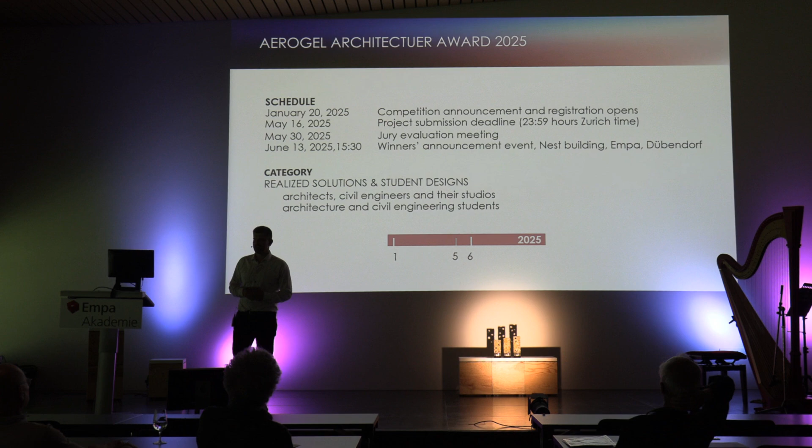In our laboratory, Empa 502, Building Energy Materials and Components, we would like to develop new aerogel materials, and also new aerogel material applications for buildings. That's why we established the Aerogel Architecture Award.

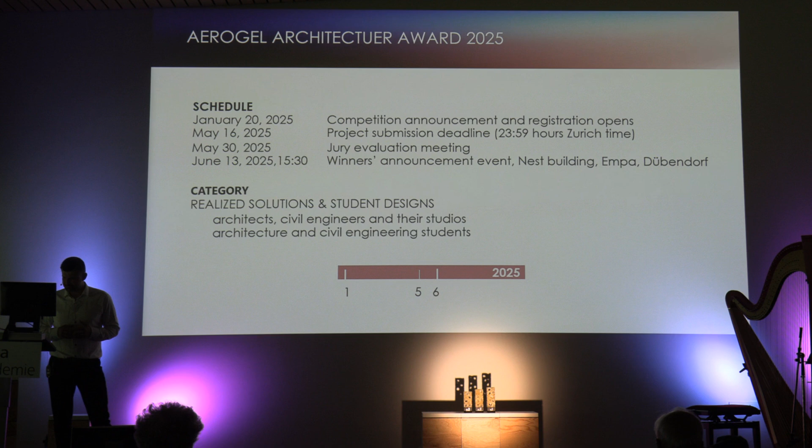We are especially interested in the thermal insulating property, translucent property, and also acoustic properties and their use in architecture. So building application of aerogels - that's why it was established.

This year there are 2 categories, which were open internationally: realized solutions and student designs. But they were joined into a common joint category for this year.

The purpose of this award is to highlight great examples of aerogel use in buildings, and to summarize experience on aerogel use in architecture and construction.

And we believe that it can strengthen the knowledge and also the trust, which was mentioned already here, in the use of aerogel materials. This was only possible due to our

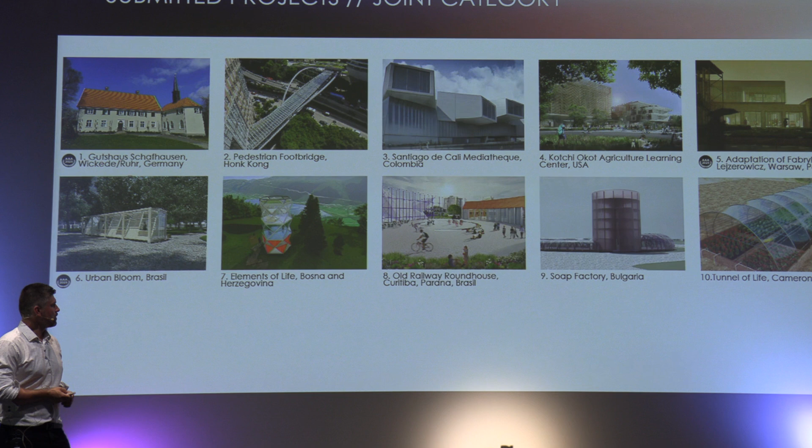Thanks to their experience, the selection and evaluation was in great hands. We received 10 projects in these two categories. We know that aerogel in buildings is niche, but we didn't know it was so niche, so the jury decided this year to join the categories and evaluate all projects jointly, rewarding them with the same monetary prize.

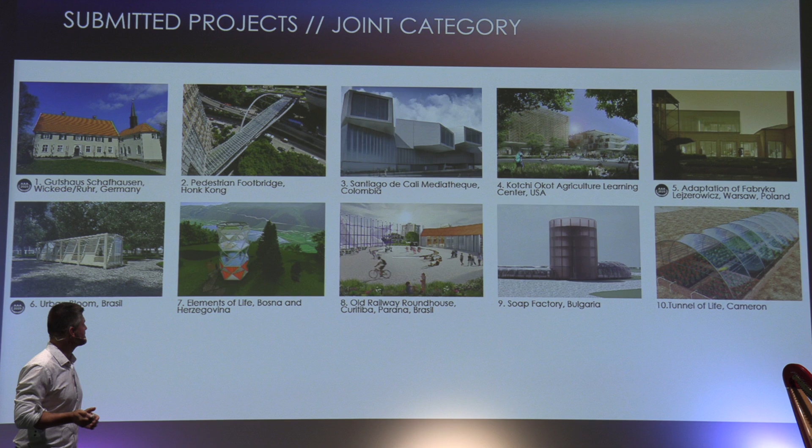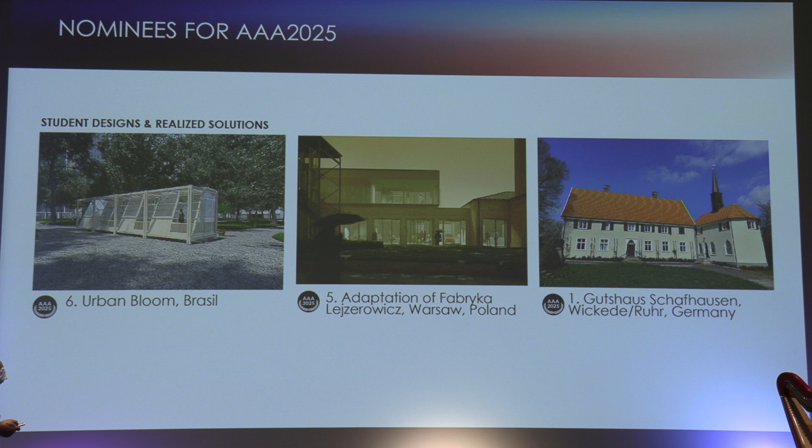Some selected projects: the first is a proposal for a greenhouse called Urban Bloom, from students in Brazil. The second is an adaptation of a factory, the Polish Fabryka Lejzerowicz, located in Warsaw, Poland. And the third, a realized project, is the renovation of the Manor Estate House, Gutshaus Schafhausen, placed in Wickede Ruhr, Germany.

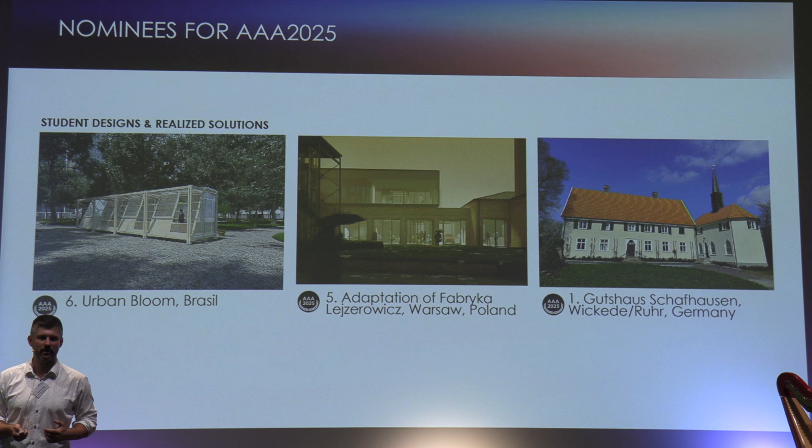Now I will ask our esteemed jury member, architect Manfred Wehdorn, to say some words on the award and the jury's selection. Okay, I can take it. Should function—yeah, perfect. Nice afternoon to all of you.

I'm one of the members of the jury, coming from Vienna, as you have heard. May I make a general statement first? I would say talking about aerogel means talking about sustainability.

To look back at the history—I'm not only an architect, I'm a historian too. You remember perhaps 57 years ago the Club of Rome was founded. And in 1983 the United Nations founded the World Commission for Environment and Development, a long time ago.

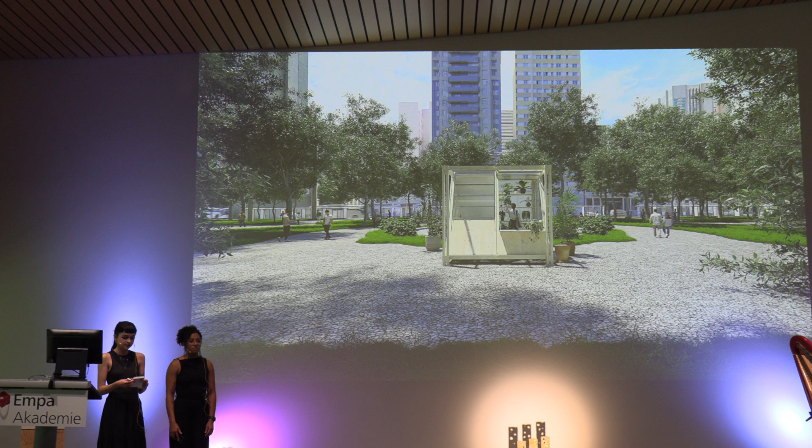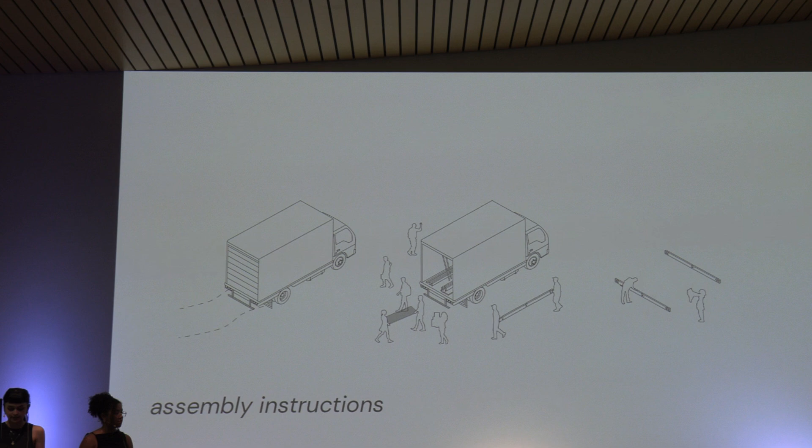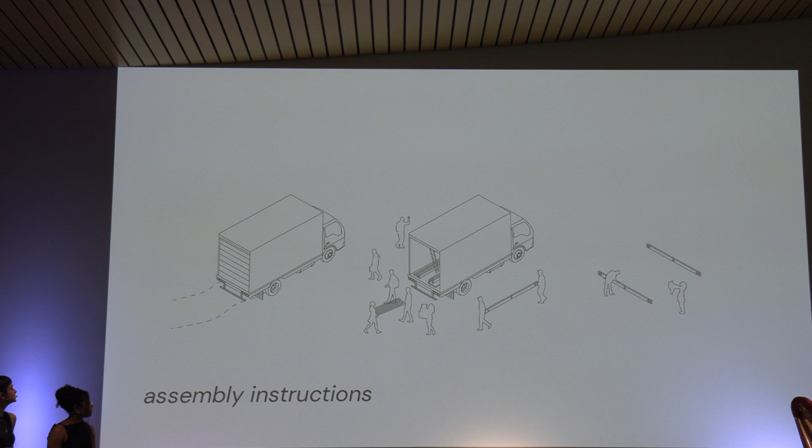One of our priorities in this project was creating a structure that could be assembled quickly and easily by everyone. For that we used prefabricated materials and lightweight components, allowing for community-led efforts. We illustrated this process with assembly instructions that are very easy and graphic, so everyone can read them and replicate and construct it in their own city.

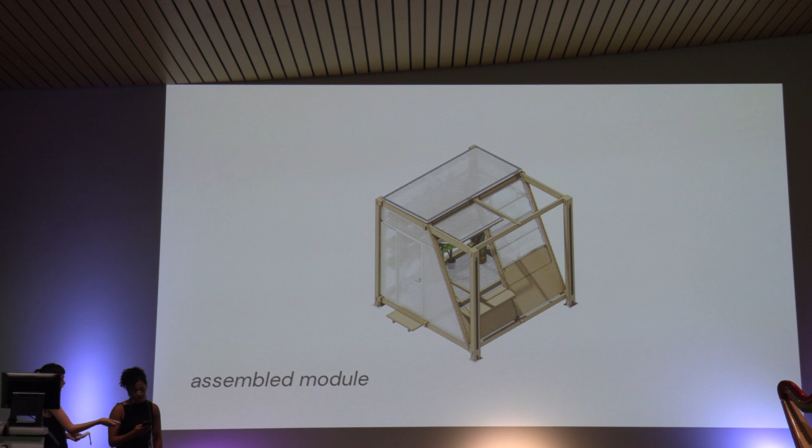Here is the assembled module. It consists of a glue-laminated timber structure sealed with translucent polycarbonate panels filled with aerogel. The design emphasizes modularity, enabling units to connect and be assembled with others if needed, to scale up to a bigger project.

The model is compact, yet it's very functional because it has the inclined facade that can be changed and can create openings in display shelves, so it can function for selling as well as marketing, but I would say it's a very functional, modular design. In this floor plan, you can see better what I just talked about, because you have openings that can show displays, can create displays as well.

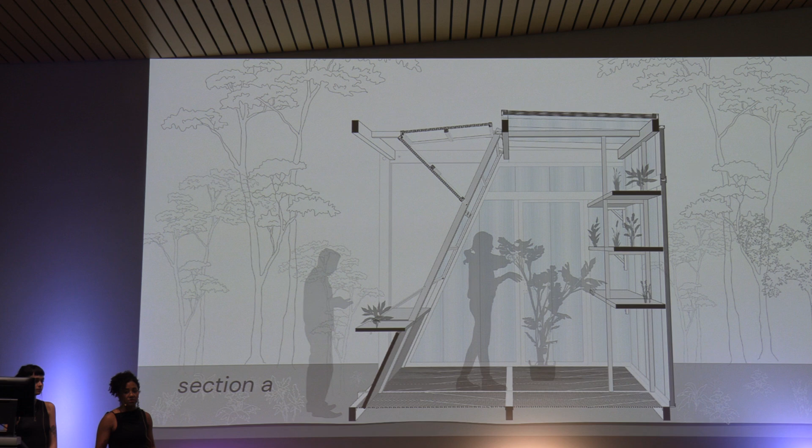In the section view, you can see better the aerogel polycarbonate panels. We use two types, one 40 millimeters and the other 20 millimeters, and we use this material just because of these properties of creating thermal insulation and light transmission capacities. This creates a perfect environment for this type of structure for plants to grow.

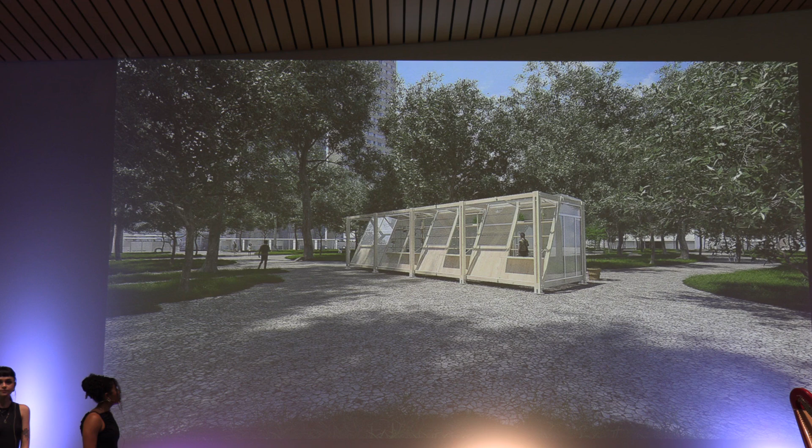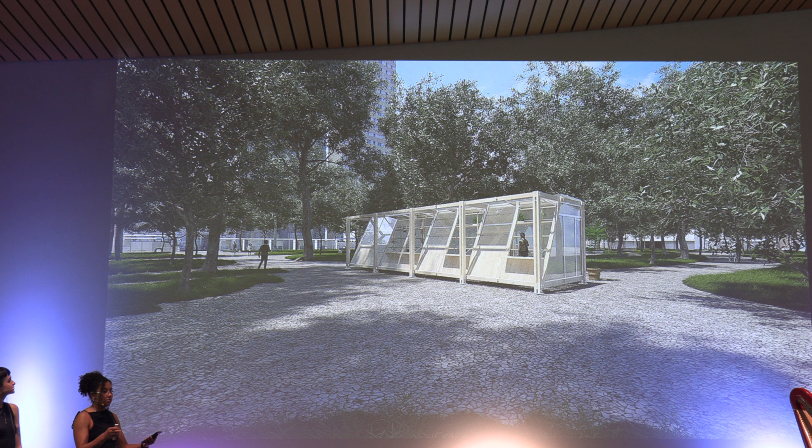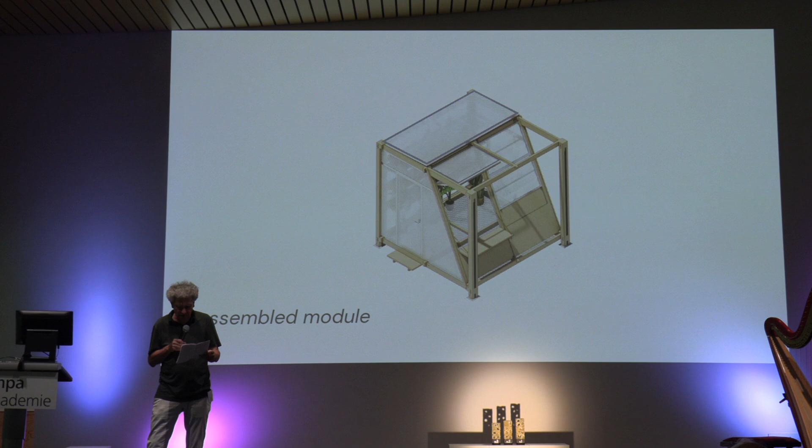The construction is based, as you explained to us, on a timber skeleton and standardized polycarbonate panels filled with aerogel. All parts can easily be transported by truck and assembled by hand on site. For use as a commercial stall, some panels are movable to form canopies or shelves. After use, it can be disassembled easily and transported to another place. Many characteristics of aerogel are highlighted in this project: it is not heavy, well insulating, and transparent. The study shows a new and very innovative use of aerogel. Thank you for your project.

The second presented project in this joint category will be the project of adaptation of a factory, Fabryka Lejzerowicz-Lubelska Kamionek, located in Warsaw, Poland. The design is made by students Jiří Petrželka and Kristýna Klůsová from Czech Technical University, Department of Architecture, Prague.

I can say that this duo already won the Aerogel Architecture Award 2023, first prize in the student category two years ago, and it's a great success again that you were selected among the nominated projects. The floor is yours, Jiří. Unfortunately, Kristýna could not come, but yeah.

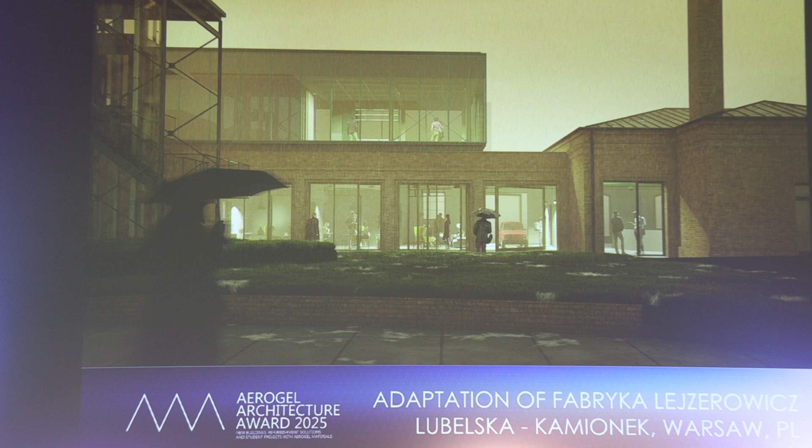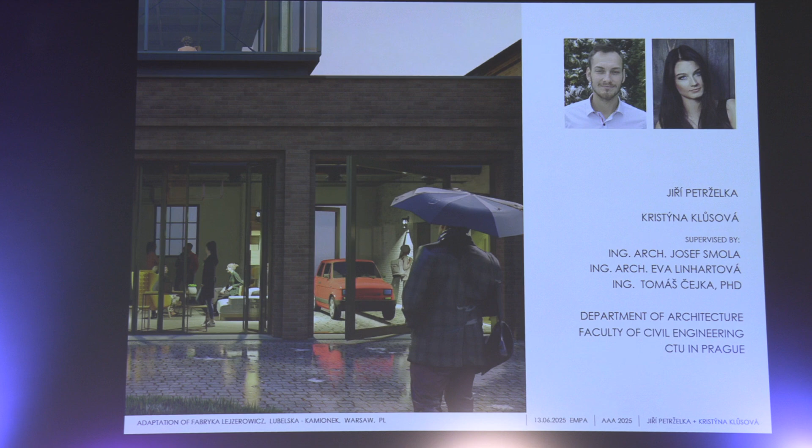It's my biggest pleasure to be here again and make a presentation for our next project, adaptation of Fabryka Lejzerowicz in Warsaw. My name is Jiří Petrželka, and with my colleague Kristýna Klůsová, we are architects and architecture students from Czech Technical University in Prague. For a start, our project is located in Warsaw in Poland, district Kamionek, on Lubelska street.

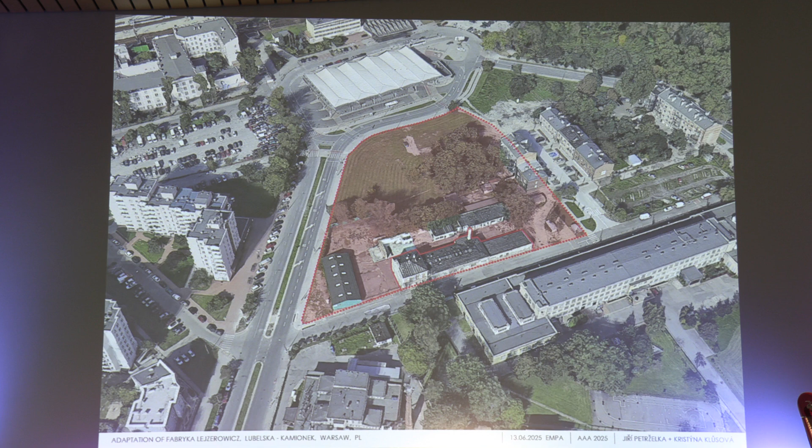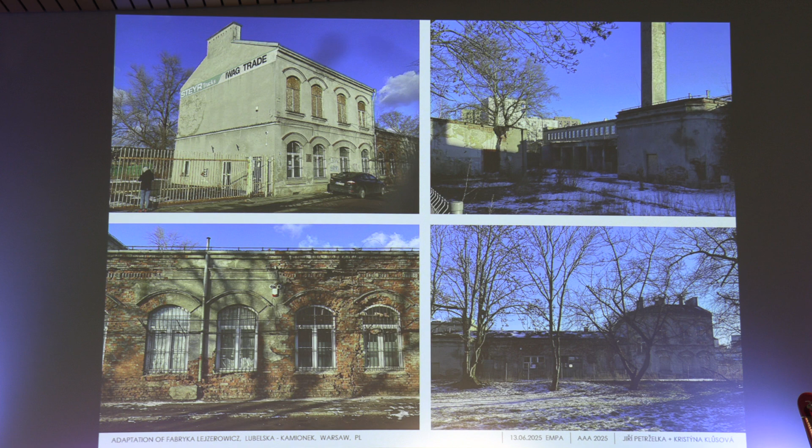Here you can see the site. It's a large area of brownfield with a protected heritage building, and the rest of the buildings are for demolition. Here you can see just some photos from the area. As you can see, the building is in really bad condition due to a lot of the properties or permissions.

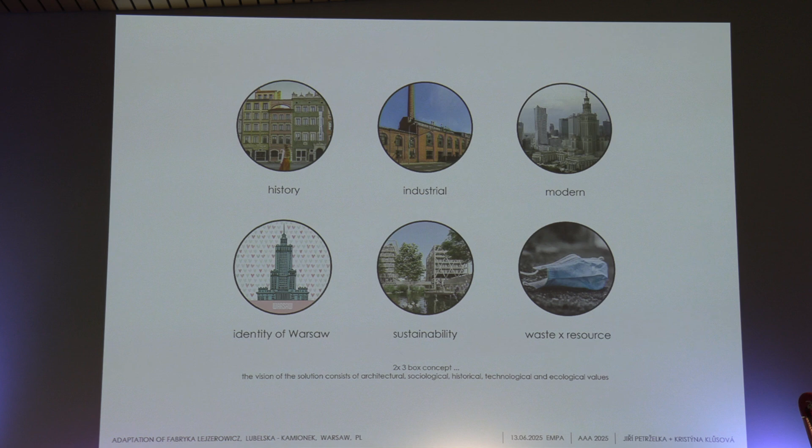And the key for our design was how to connect history and the industrial history with modern sustainable architecture in Warsaw, which is key to the new identity of the city. And the last point was how to work with reduction of the amount of waste and resources.

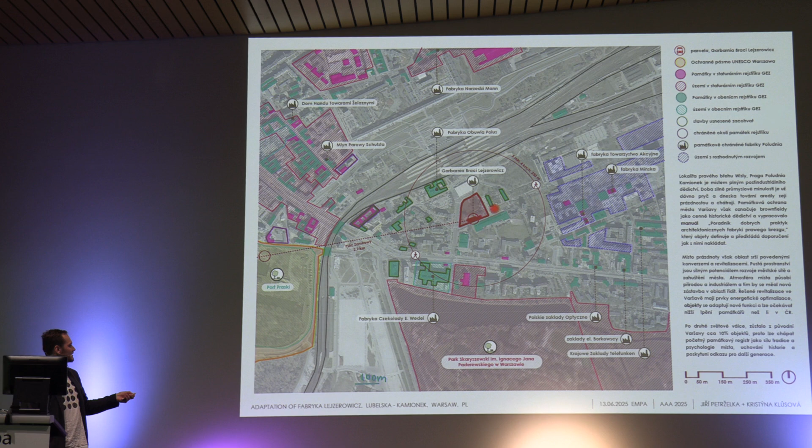In the analysis, you can see that the site is near the train station and bus station with really frequent train and bus traffic. Here's an analysis of the site, where you can see that a lot of parts are heritage protected buildings, and a lot of parts are part of the new vision for the next transformation. And the entire area is full of parking cars due to the frequent public transport.

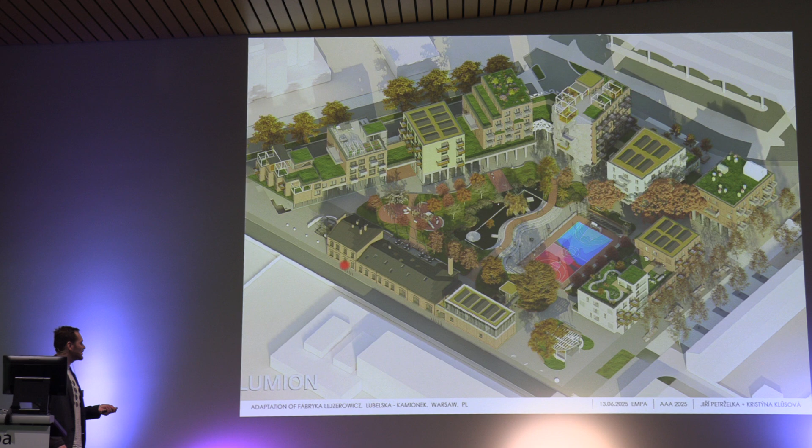The first question was how to transform the brownfield into a new architectural catalyst to change this area in Warsaw. And here is the result: we find the best connection, designing the old building into a new culture and public center, and the rest of the building is co-living, owned by the city.

Here are some urban concepts that we focus on - some views and connections, the division of spaces in height. Our courtyard is the heart of the entire project, and we work with human scale.

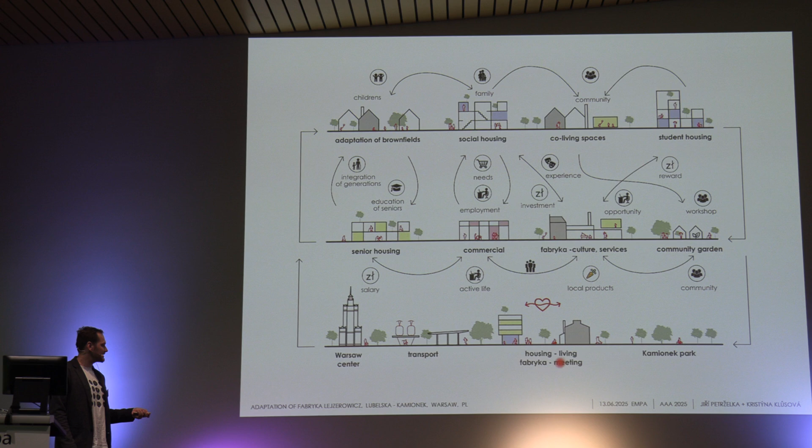Here's our urban concept, where we want to focus on connections and flows between the people in the new area and the entire city. We want to create, from our side, the connection between the city center, the transport, and the surrounding area.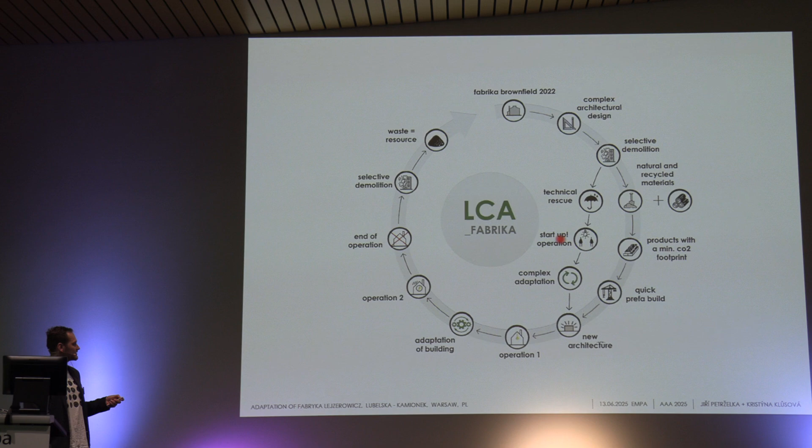We start with the design, selective demolition of the surrounding area, and two lines. The first is the really quick prefabricated development, and the second is the technical rescue of the Fabrika as a meanwhile solution, followed by complex adaptation, resulting in new life for our place.

Here's a visualization of the new co-living in Warsaw. The ground floor has at its heart a multifunctional yard with playgrounds, and the ground floor is full of common rooms and commercial premises. The typical floor is full of living units with some common rooms for the residents.

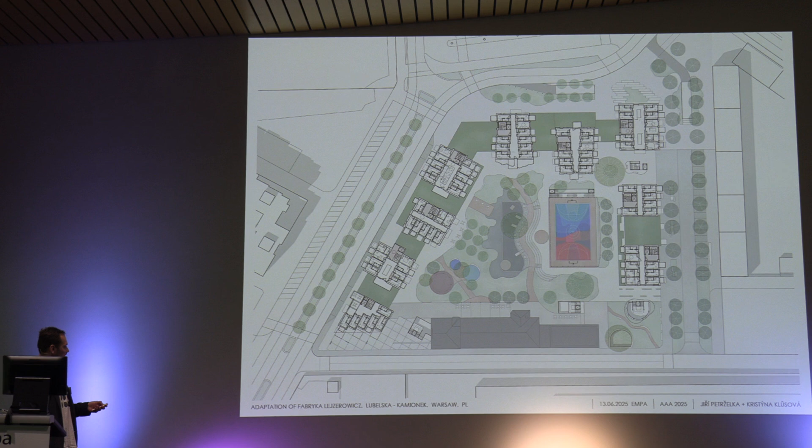Underground includes public and private parking with the multifunctional playground.

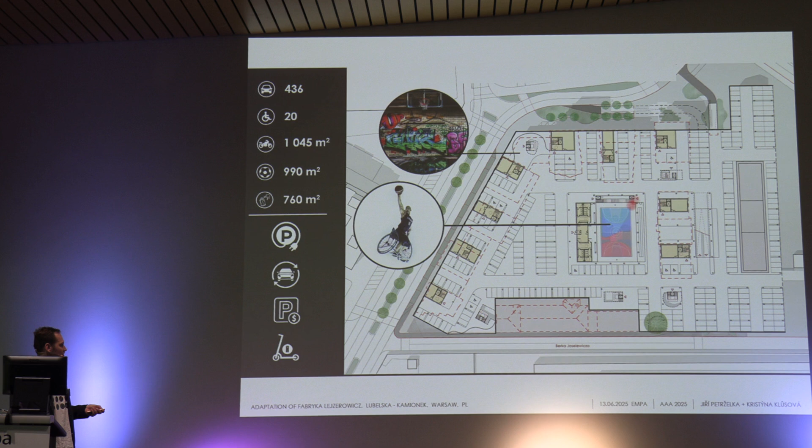The rooftop landscape, in our view, is a place which can give us more functions than just cover or shelter from the rain. We use the roof for photovoltaic power plants, public spaces, and green points for better biodiversity in the city.

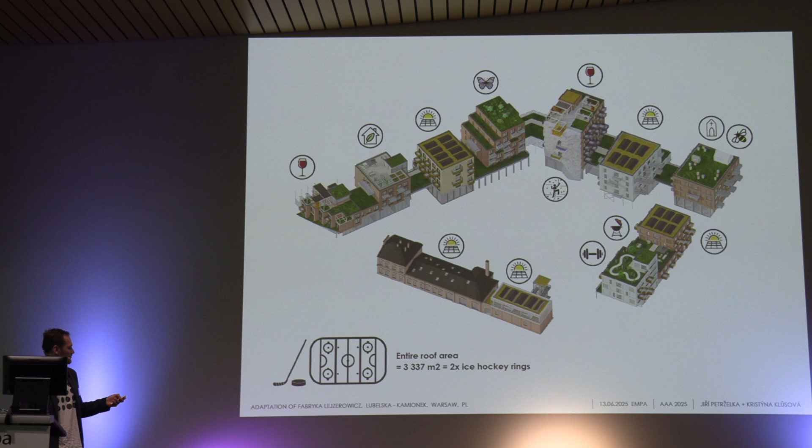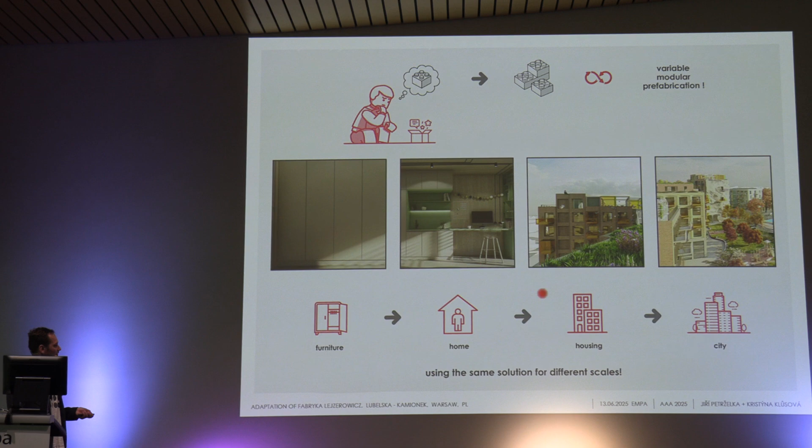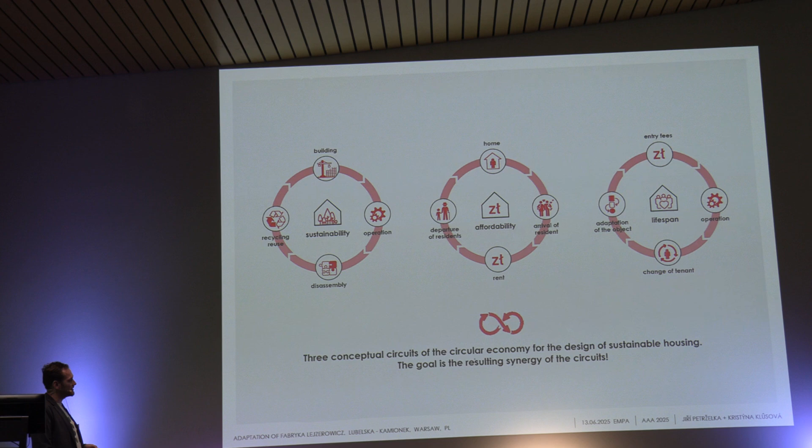This co-living is designed as prefabricated architecture, from the small scale of furniture for the home to housing for the entire city. We use the same system for everything, and everything works. Our entire project is designed as affordable community living, which is owned by the city for everyone.

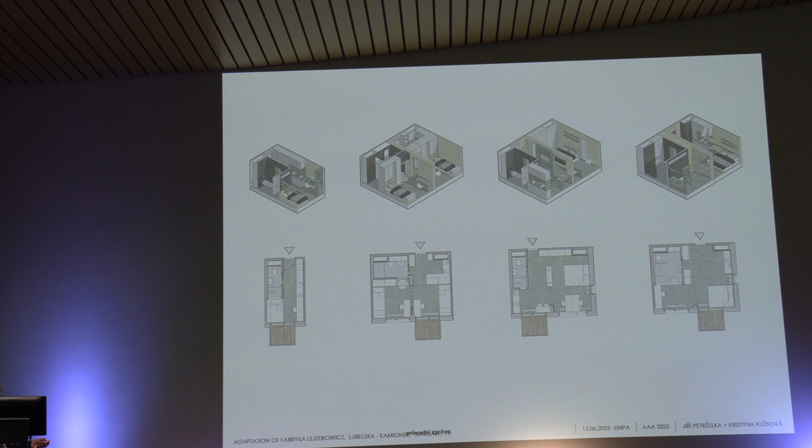Here are some kinds of dispositions - something like prefabricated modules. There's an interior with very visible CLT modular prefabricated boxes and an integrated internal sanitary box.

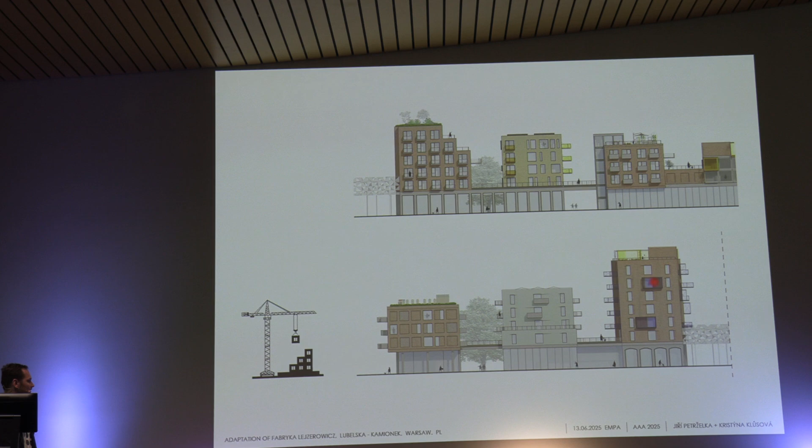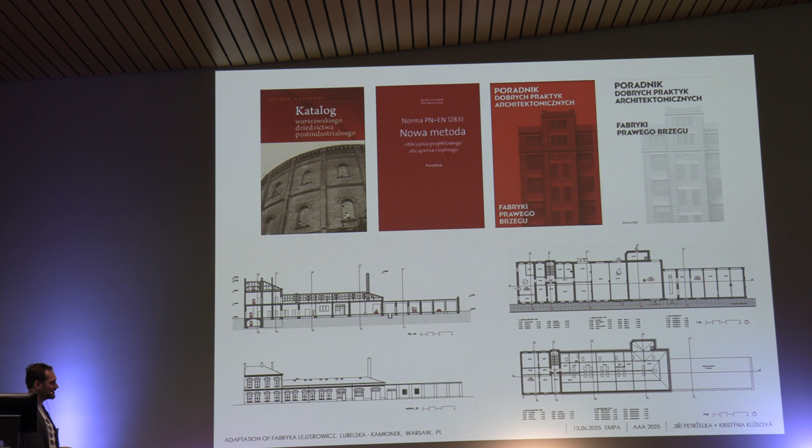Now, adaptation of the Fabryka. We start with collecting data about the building and communication with the good practice guide for heritage architects - something like the heritage protection office in Warsaw.

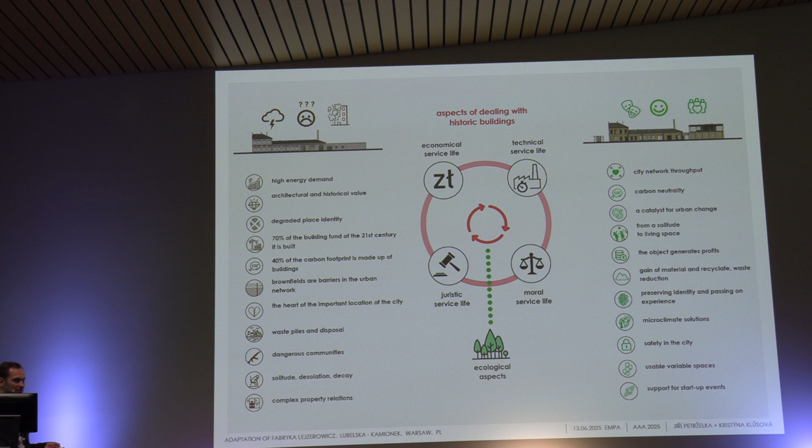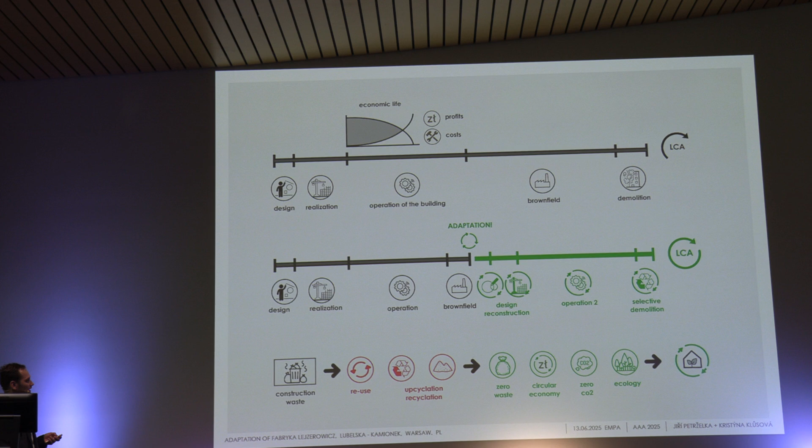We make a deep analysis where we find details, problems, values, and other things. After that, we made a list of reasons why it's good to adapt this kind of building. With good adaptation, we can give new life to the space which we have in our lives now.

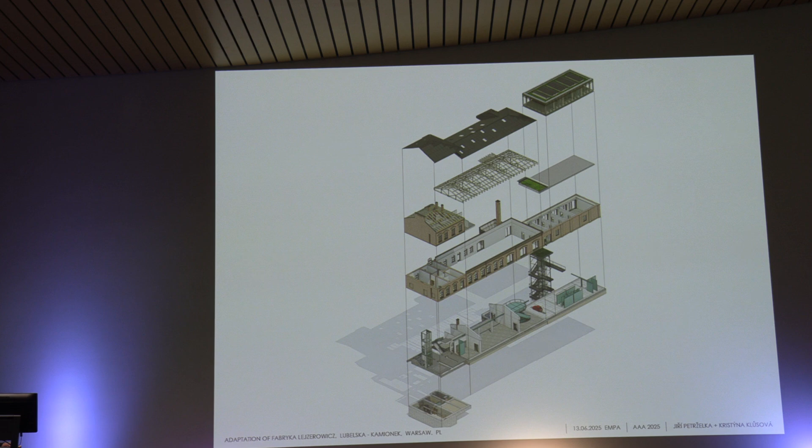Our design includes flexible open space for community and culture events. Here's a visualization after optimization and adaptation.

Here's something like street food, multi-purpose halls, offices, and a place for meetings. There are offices, and in this new part there's co-work space, and in the underground a meeting point and parking.

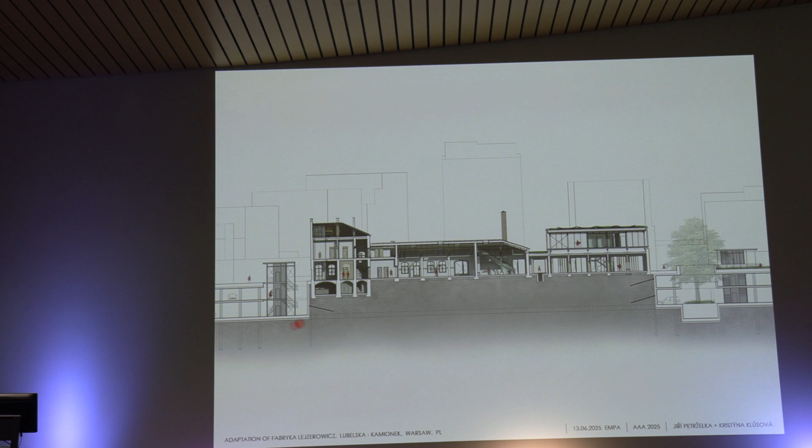Section of our solution and how we solve some problems with the repair of the old building and the new underground parking. Here's some visualization.

For example, the entire furniture in the hall is collected by the new community. We use this kind of interior design as a way to connect the people.

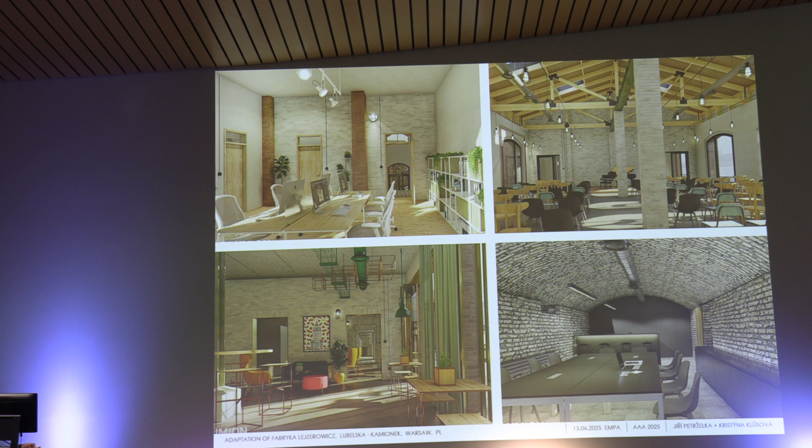The next part is the new co-work space above the old building. It's open, flexible space for everything, and it's really good with really good adaptation in the future.

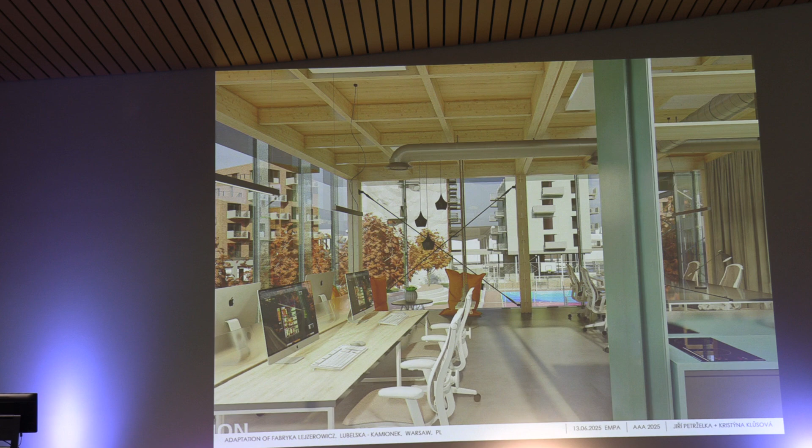Visualization of the interior. The construction is something like a glulam timber frame module with a curtain wall with glass, and the glass facade uses electrochromic glass and transparent photovoltaic foil, which protects the interior from overheating.

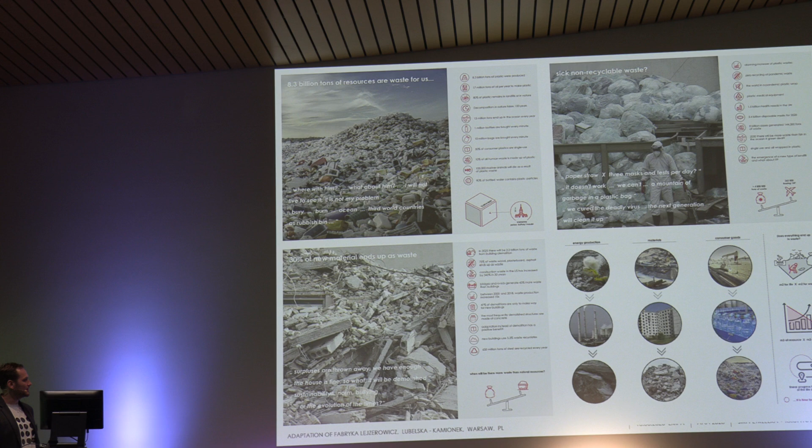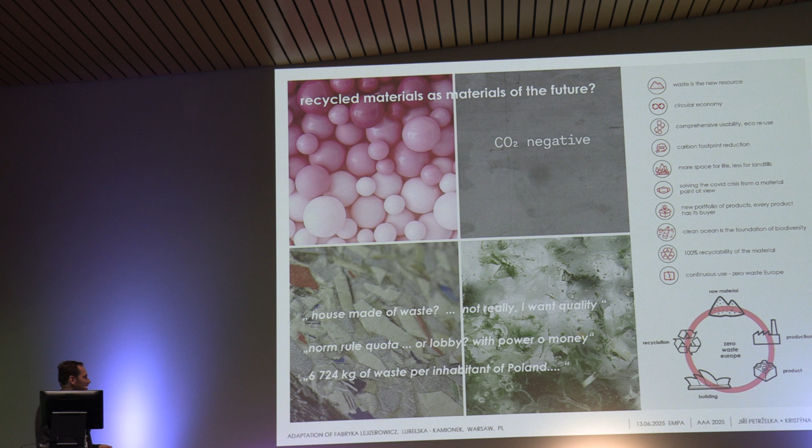Next topic: from our point of view, all human production ends up as waste. In the future, we think that recycled materials and materials from waste will be the materials of the future, and reusing and recycling is one way to find new sources. Another way is working with selective demolition and urban mining.

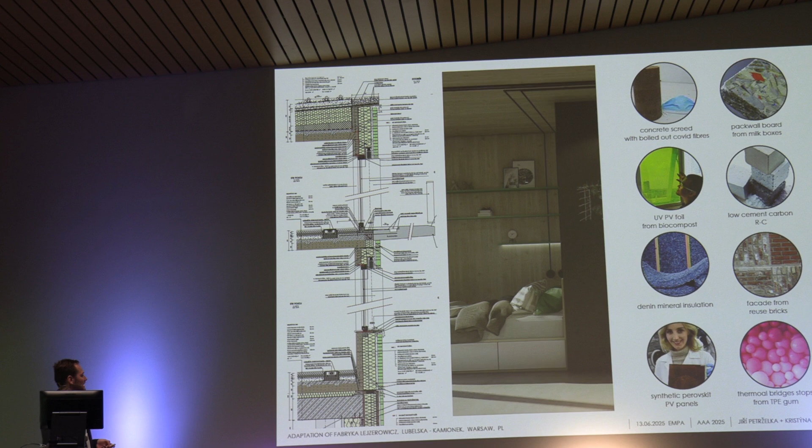So we designed this library of atypical materials from waste, demolitions, etc. For example, we have some materials from COVID mask fibers. We use this kind of material on the same level as typical materials, using it on our co-living building for the adaptation of the historical building.

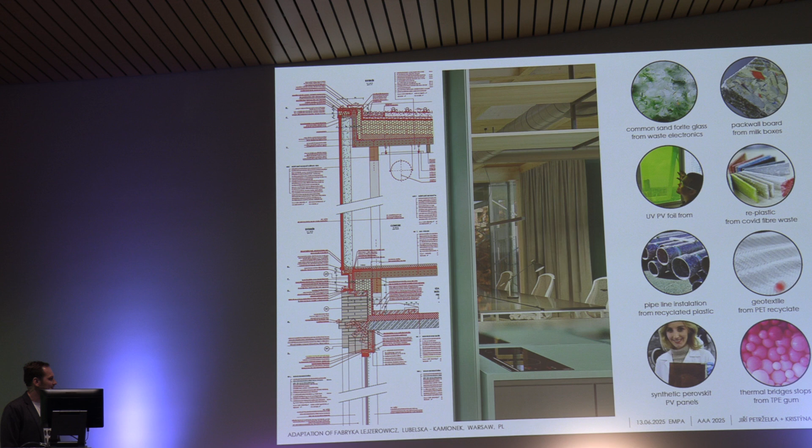And for the new part of the work, co-work, we use, for example, foam glass from electrotechnical waste, packwall board from milk boxes, and plastics from COVID mask fibers. I really like this thermal bridge stops, made from TPE gums and chewing gums.

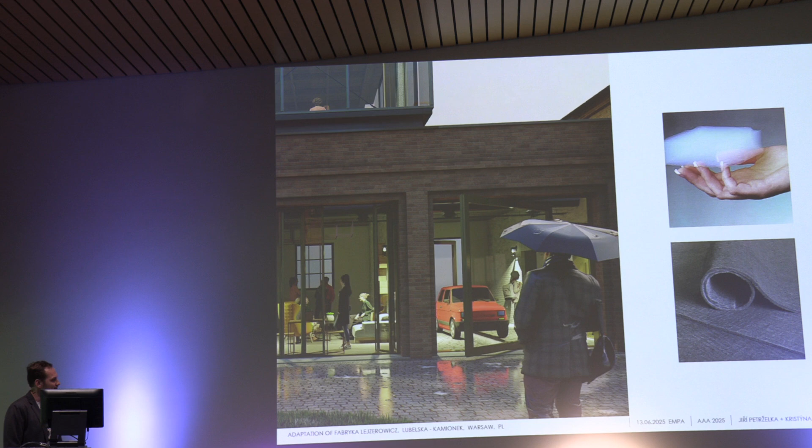And the last part, how we use our aerogel in our design. We use aerogel as an internal insulation system in our old buildings for the facade, and for some typical or atypical details in the new part of the building. We design it as a combination of aerogel and OSB insulation boards — taking the aerogel insulation with some thickness and typical aerogel adhesive, gluing it to the OSB panel, which works as the vapor barrier and a supporting system for the aerogel.

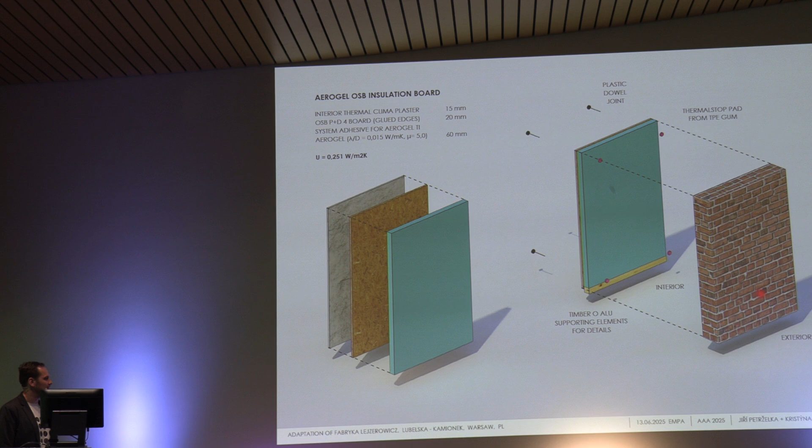One of the reasons is that due to the heritage values of the building, it was necessary to keep these bricks visible on the facade. After that, we drew some details and the application for the building to match all the historical parts. After optimization, the energy demand class of the building was improved from class G to class A.

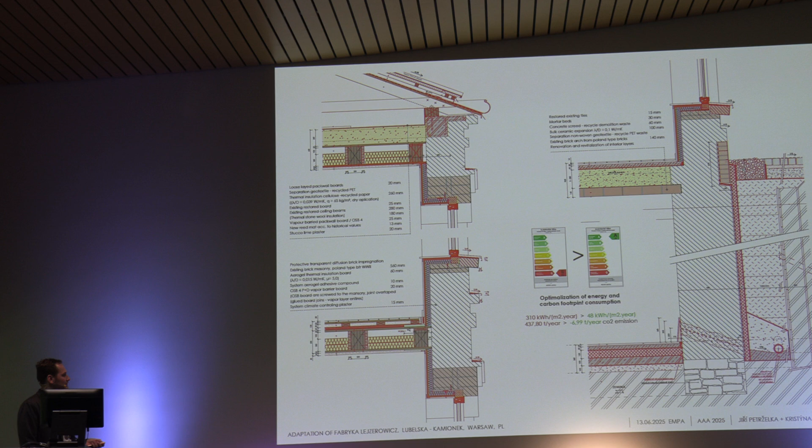Our solution, in our point of view, is a little bit atypical, so it was necessary to run thermal bridge simulations where we checked problematic spaces with surface temperatures and humidity fields. After that, we confirmed we don't have a problem in the construction system.

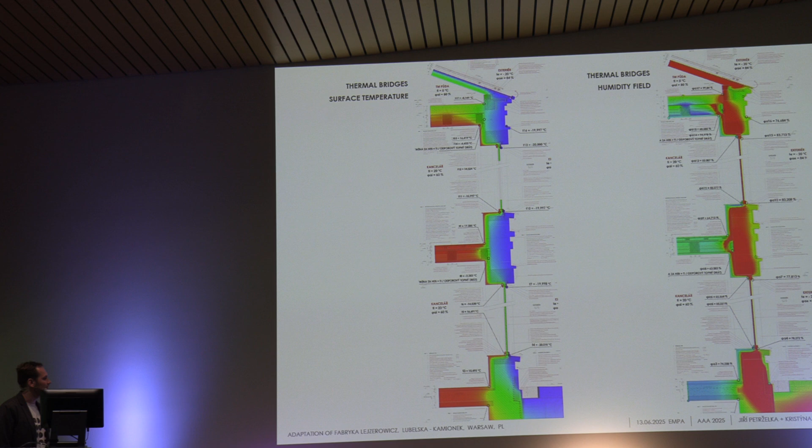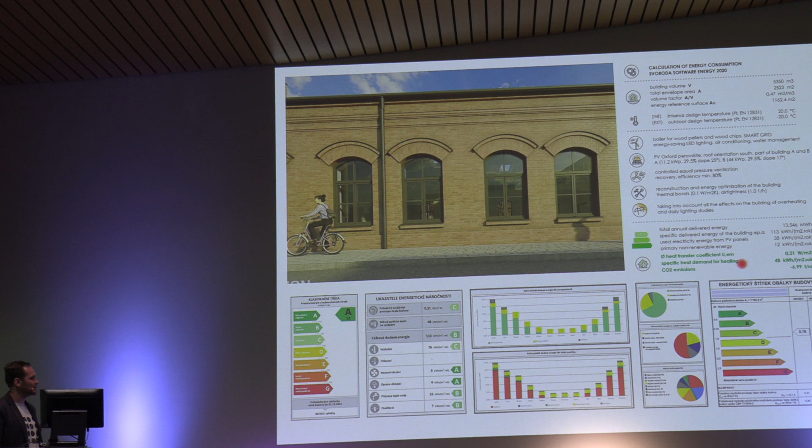So that's all, thank you very much. I would like to show you that it's possible to work with heritage protection, waste materials, and aerogel in one building. Thank you very much.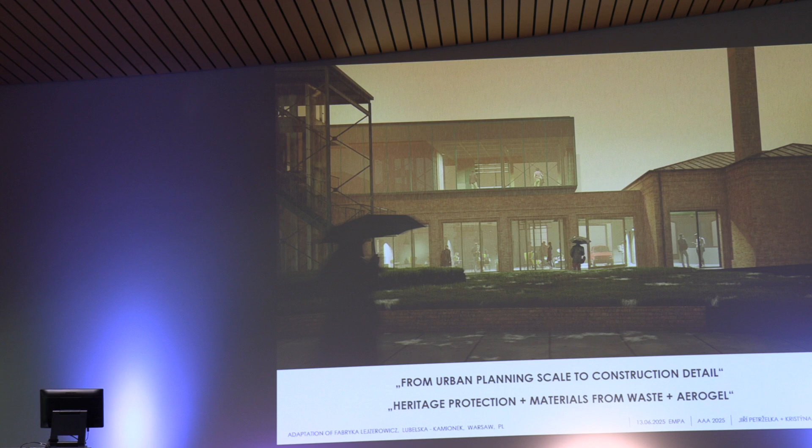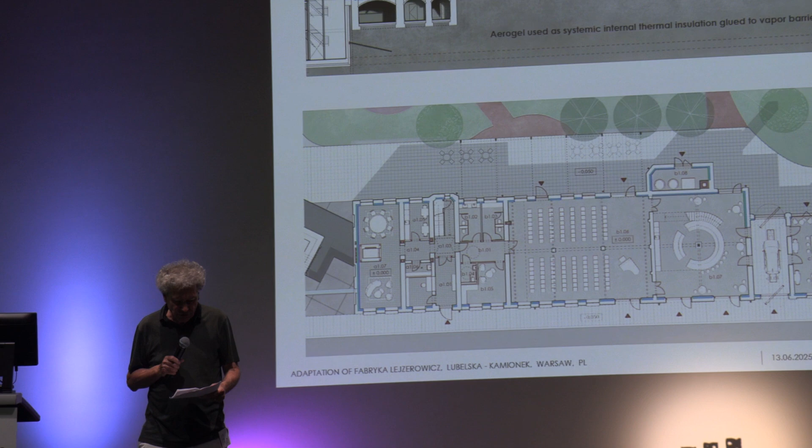Thank you very much, you explained already everything in very good detail. So the comment of the jury is: the project is part of the transformation of a large brownfield in Warsaw in Poland. An old factory is adapted, restored, and extended to a cultural center. The old building is characterized by a brick facade and a wooden roof construction. In the new addition, recycled materials are used, and the minimized architectural expression contrasts strongly with the masonry of the existing building. The facade with the nicely detailed brick masonry of the existing building is carefully restored and preserved.

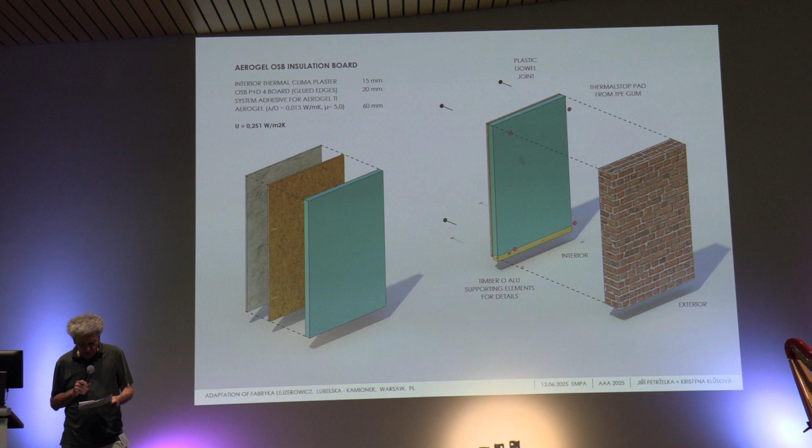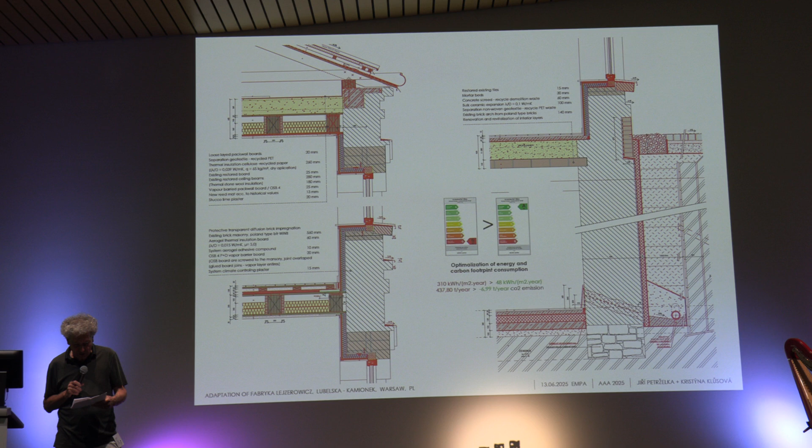To save the facade, it is insulated on the interior with 60mm aerogel panels and a climate-regulating clay plaster. Integrated photovoltaic panels on the roof construction complete the energetic system. Thermal insulation of the construction — thermal simulations of the construction prove the effectiveness of the chosen solution. The study is a showcase renovation project for different sustainable constructions, including the advantages of aerogel. Thank you.

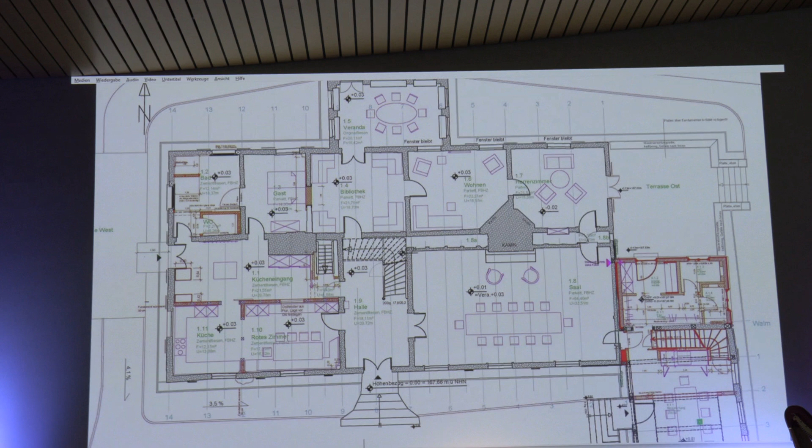When the current owners acquired the house and property in 2018, we did not yet know what lay ahead of us. The general planning was initially quickly done. The main house will remain a residence for a large family, and the chapel will be converted into a meeting and seminar room, relaxation room, and now also serves as a civil registry office for weddings for the community. An adjoining washhouse replaces the toilet tower.

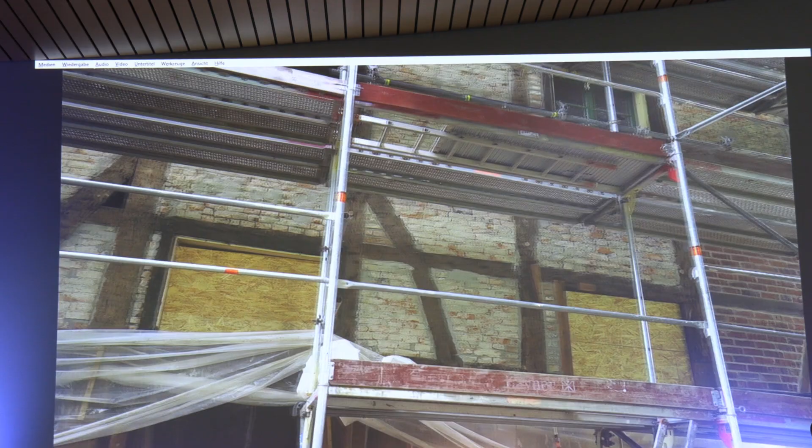At the same time, we considered how we could tackle the plastering issue, as there were already some considerations regarding the energy supply of the house. The goal was to heat with as low a temperature as possible, and to heat it as ecologically as possible. The objective was also to use building materials that could all be separated from each other if one wanted to do it differently. And the following decisions were then made.

At the southern edge of the property, there was a barn that had since been converted into a breeding stable. In the basement of the stable, a heating house with a double wood chip heating system was built, which can now supply all buildings of the property in the form of a district heating network.

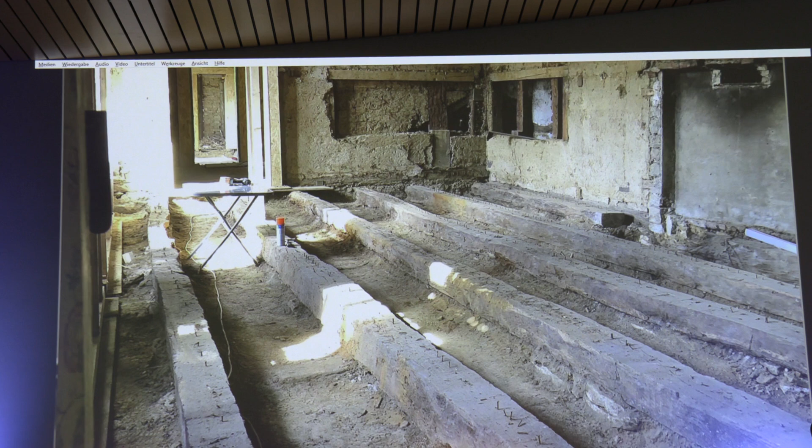Then it was decided to excavate 50 centimeters of the non-solid part of the main house to bring in crushed glass as a base for the new floors. They are all equipped with underfloor heating. Additionally, wall heating has been integrated into the clay plaster in critical, potentially thermally critical areas.

Now the topic of exterior plaster came up, and we initially considered using panels, but the Monument Protection Office pointed out that there is also a thin insulation plaster available. So let's take a look at that - oh, that's Aerogel. At this moment, we contacted various manufacturers. Ultimately, we decided on the products of the company Fixit.

Together, all details were coordinated. During the trial process, a window was also built as an example to know the connections to the subsequent trades, to learn about the workflows, and to coordinate that with the monument protection.

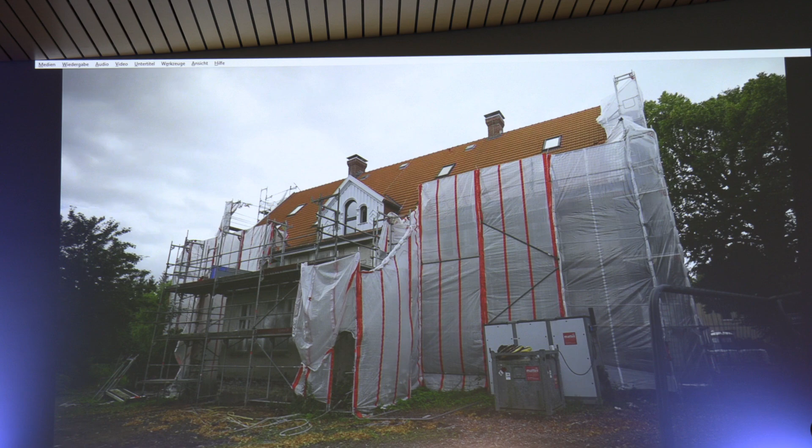And then it started, sure, with a big number of different details. Unfortunately, after several weeks of work, we had to find out that the first company had worked incorrectly. This led to the necessity of completely tearing down the plaster and substructure in the area of the main house, and then having to find a new company.

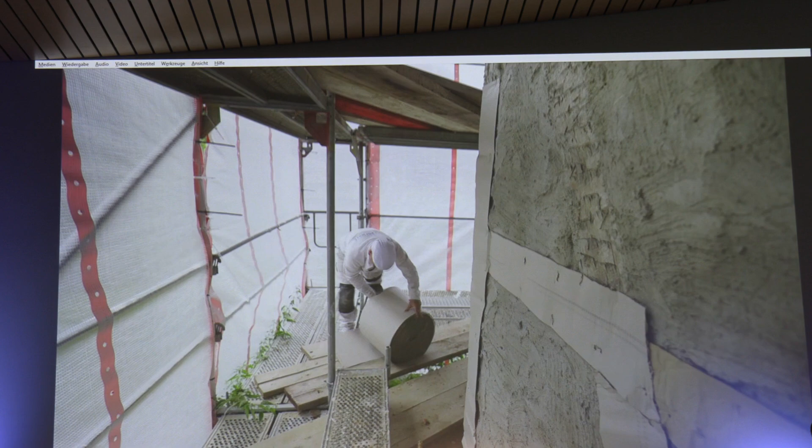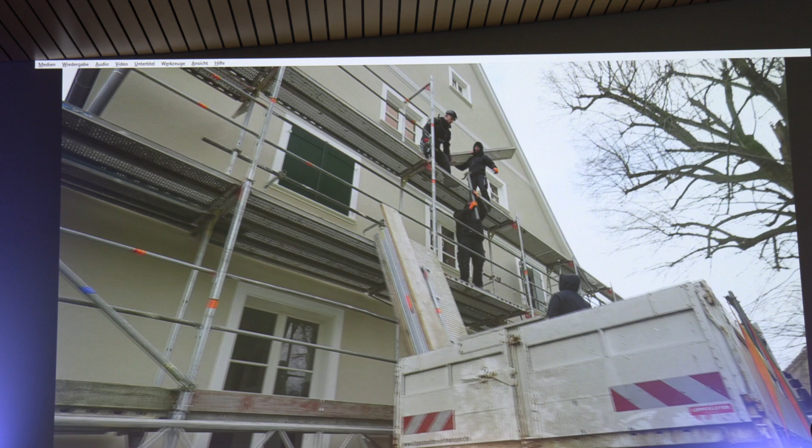This one worked well on it, supported by experts from Hazit, so that in December 2023, finally, after 5 years, the house's scaffolding could finally be taken down. And for the first time, we had the new house completely in front of us.

In the following stage, the base coats were integrated. That could only happen after the completion of the terrace buildings, because this has to be done together. The wonderful aspect of this very thin insulation plaster with scratch plaster is that it was able to create very rough and also crooked and curved surfaces of the timber frame. So we still have a very old building, but with new technology and new possibilities.

In German, we call it steinfühlig. We will save about 25 to 30 kilowatt heating load, calculated. This also convinced the owner.

Not admittedly in the question of when it pays off, but he wants to take responsibility for consuming less energy. And quite obviously, in combination with the newly installed chimney and stoves, it works well in the house. The comfort in the house is very satisfactory.

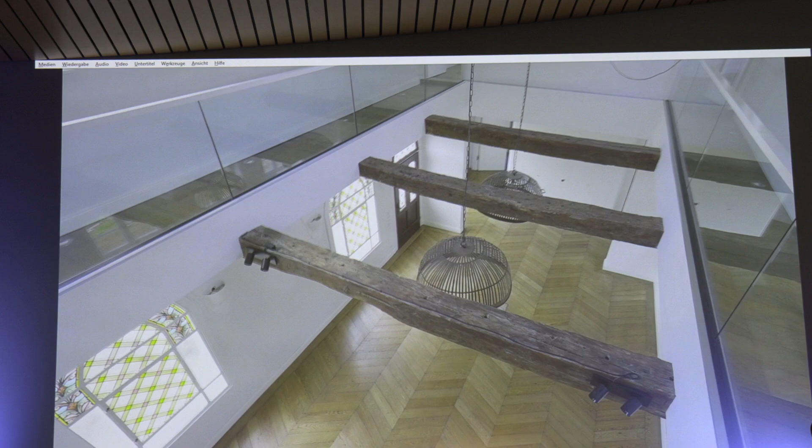It is warm, cozy, and through the clay plaster construction, the indoor climate is exceptionally pleasant. I will now show you some photos from the inside as an example. Here is a little tip: all the oak furniture elements you see in the photos were made from the old beams that were still worth preserving when the building was partially demolished. It seems modern, but it was always done in the past - we just call it recycling or reusing now.

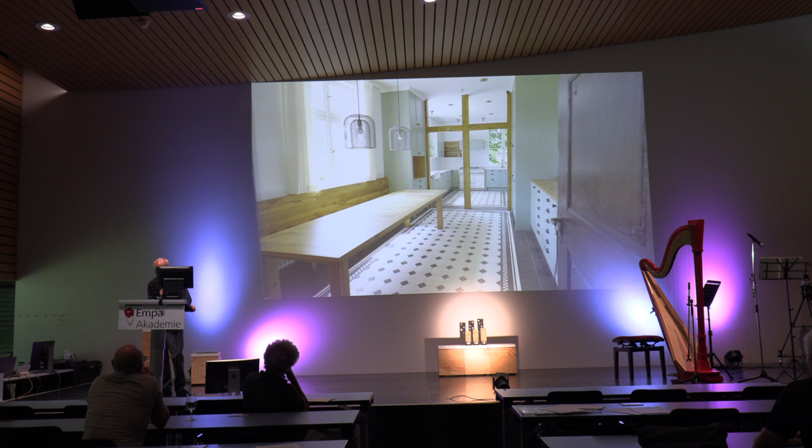Several points have been important for the decision of the jury. First, it is a realized project. Second, it is a listed monument. Third, it has been really a terrible situation before restoration. So the jury came to the conclusion the restoration is a typical and successful example of the daily work of planners in practice. The goal was a thermal restoration while keeping the characteristic, historically grown outlook of the building.